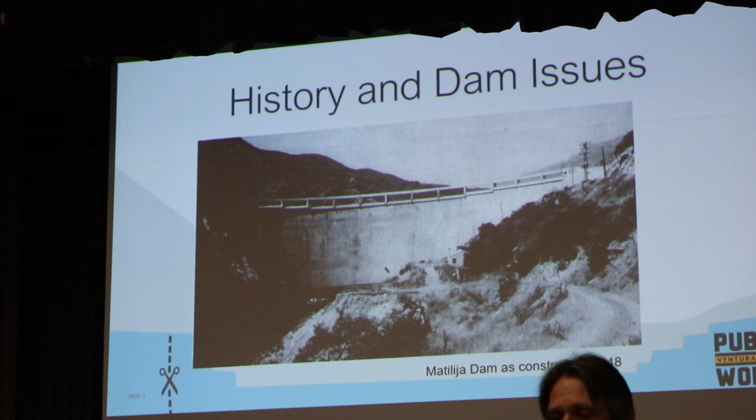Is this me or? What's that? What? Oh, no, seems like the volume's going up and down. I'm trying to keep myself.

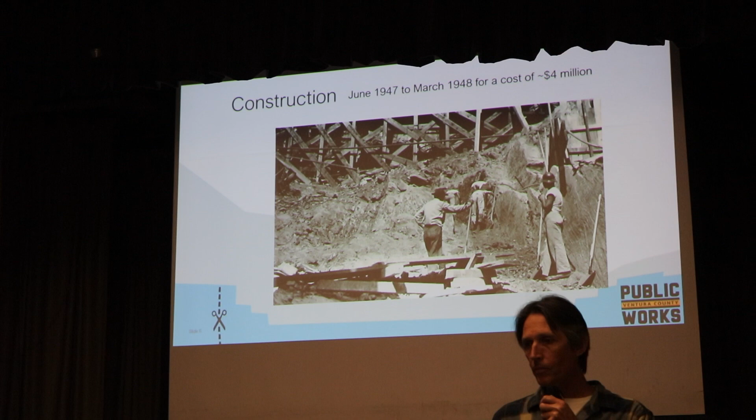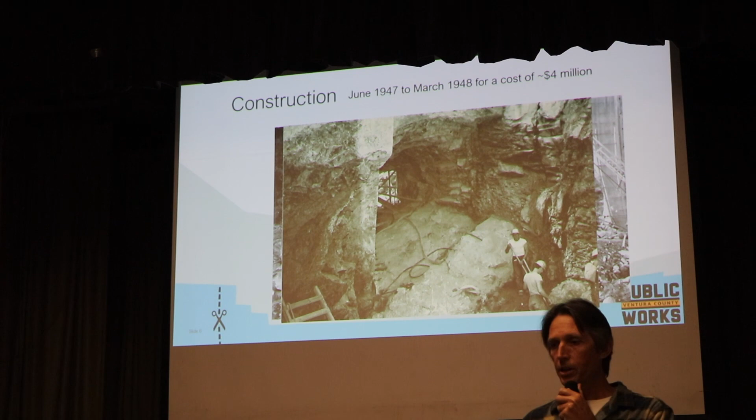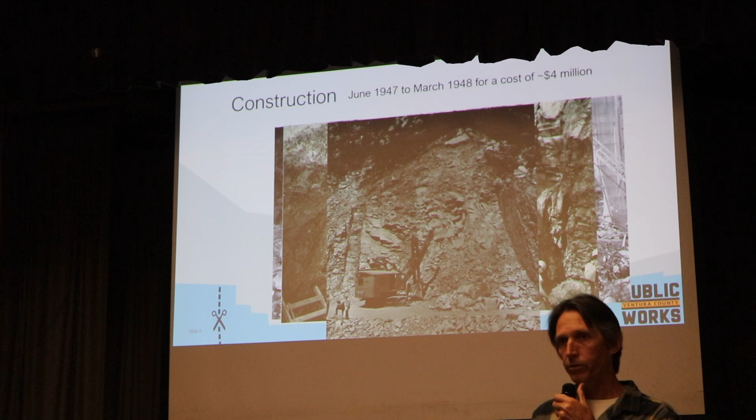So the dam was constructed starting in 1947 for a cost of around $4 million at that time. There's some really interesting photos in the Watershed Protection District's archives. And this was the first project. This was the project that actually founded the Watershed Protection District at the time. The flood control, Ventura County Flood Control District. Is there anything specific I should point out?

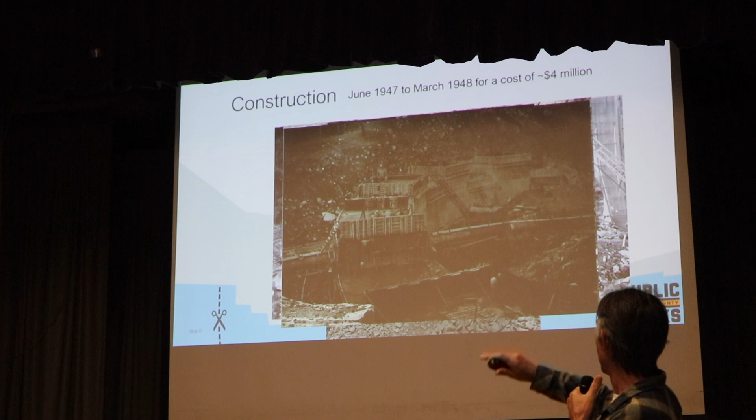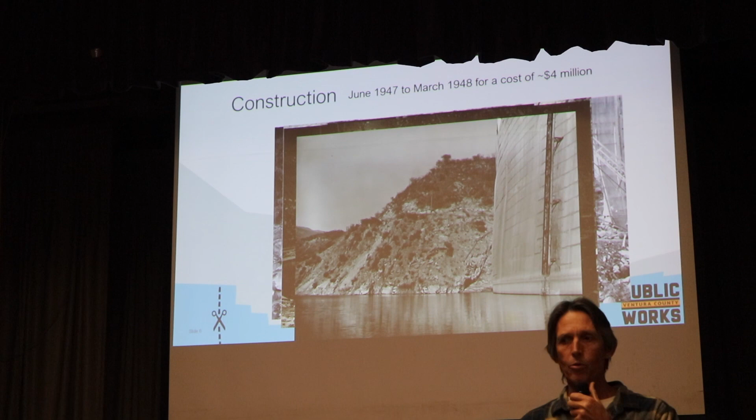You can see that the way these dams are constructed, they form it up and they pour a layer or a lift at a time, and each of those lifts I think is about 7 feet or so on Matilija Dam. Lots and lots of concrete went in. This is what it looked like when it was finally constructed and the reservoir started to fill up. I think it actually took about 4 or 5 years for the reservoir to fill. It was 1954 before it filled up.

But it was only 15 years or so before it became evident that there was a chemical reaction in the concrete. And this alkali silica reaction is actually something that was really common throughout the United States, throughout the world, and bridges failed and stuff because of this.

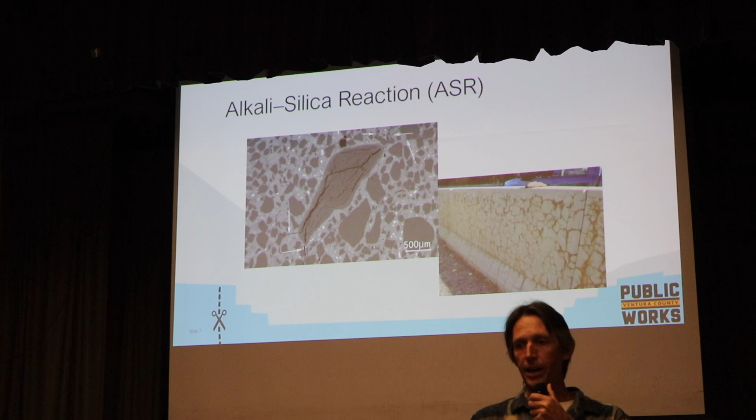The story that I heard about this is that the contractor was actually supposed to go over to the San Gabriel River to get some nice granitic neutral sediments, and instead went over here to the Santa Clara River, and our sediments here are very alkali. So that ended up creating this alkali silica reaction, which compromises the strength of the dam.

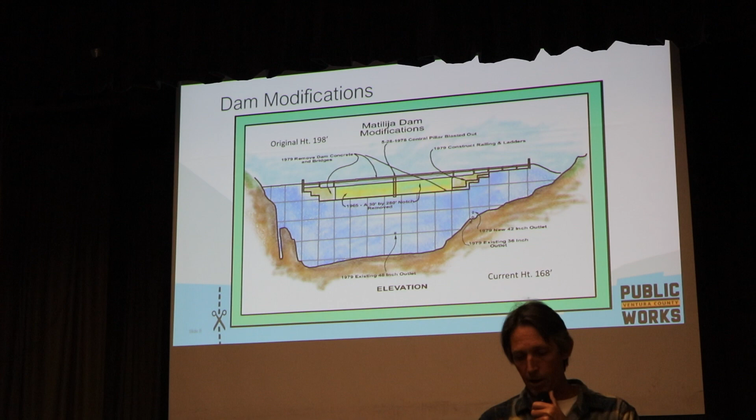So in 1965, the dam was notched down. We call that notch. It just lowered the level of the dam by about 30 feet. And you can see that middle section that's yellow there was taken out in 1965, and then in the 70s they came back and cut those stair-step things that we see on the dam today.

The original storage capacity of Matilija Reservoir was about 7,000 acre-feet, and there was a county park back there. There was boat rentals and fishing and campground and some recreation. But in comparison with Lake Casitas that was constructed about a decade later, anybody know the capacity of Lake Casitas? 254,000 acre-feet.

So you can see that Matilija was always sort of a drop in the bucket as far as water supply. But at the time, it was intended to divert water, store water that could then go through a pipeline over to the Ojai Valley and go into the Ojai Valley spreading grounds to help recharge the aquifer during the dry season.

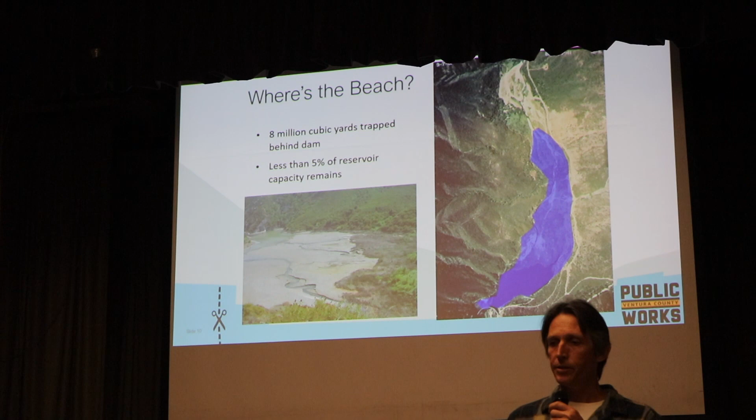Over the years after the notching and after fires and floods, the reservoir filled up with sediment. This is the fate of every dam and every reservoir on the planet. Rivers move sediment, and ultimately the reservoirs will lose their capacity and fill up with sediment.

So this is something that I've actually traveled to Japan and saw giant reservoirs there where they were actually trucking sediment out constantly 24 hours a day. And they were actually building a new island down in Yokohama Bay with all this sediment. Japanese can drive a lot of trucks around, move a lot of sediment and concrete.

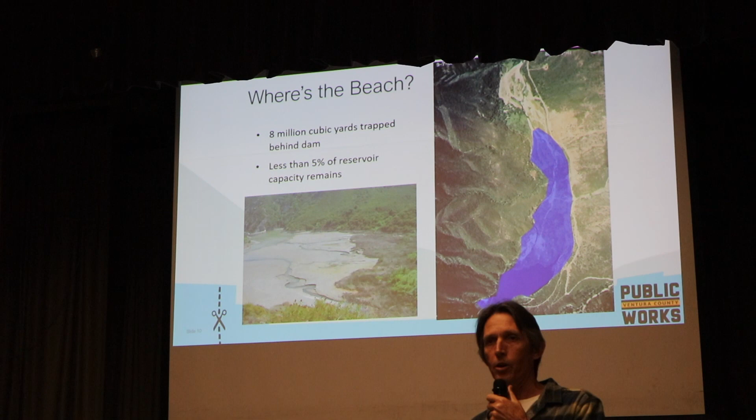But the picture on the left there, this dates all the way back to 2003, I think. It was during feasibility. And that's what the reservoir looked like when it was drained at that time. You can see how little capacity there actually is and how much sediment there is behind there.

And the reason I got involved with this was through Surfrider Foundation. The beach erosion problems at the mouth of the Ventura River led us to really start to look at what the root causes of that were. Now, construction of the bike path right on the beach was a problem. And we've solved that, or we're in the process of solving that through the Managed Shoreline Retreat project that's happening out there by the fairgrounds.

But at the end of the day, starvation of the river and starvation of sediment supplies were something that became a concern to us, and we saw an opportunity in the removal of Matilija Dam. But at the same time, there were people who had been talking about this for decades.

Many of you might be aware, this was a man named Ed Henke who had grown up in Ventura and had moved away, but he was writing. I mean, anybody who got letters from Ed Henke knows he wrote letters and wrote letters and wrote letters, and he wrote letters to the governor's office and the state congressional representatives talking about how this dam needed to be removed, because by the 70s it was already virtually obsolete in terms of water supply.

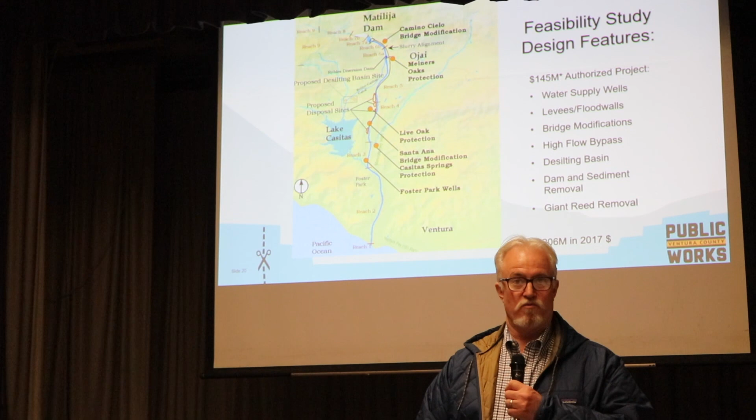And this is what the project looked like. It was a $145 million project. It was made up of many components, some of which are the same as the ones that we are moving ahead with currently. One thing to note is we did look at this $145 million, just to give you a context, in 2017 dollars, and it increased to about $206 million. So I know all of you know about inflation, the value of time. It's the same in construction and projects. The longer this project takes, the more expensive it will be.

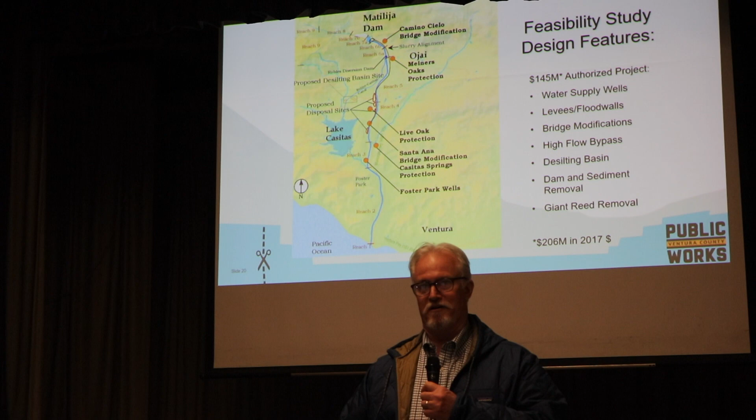So one of the components of the project, the alternative that was chosen during that incarnation of the project, was an alternative called 4B. And what that consisted of was taking all of the fine organic-laden sediment that was right upstream of the dam and putting it in a slurry pipeline and slurrying that down below the Casitas-Robles diversion. The most difficult part of this project, as anybody will tell you that's been working on it, is how to remove the dam in a way that minimizes the effect on the water supply in the Ojai Valley.

So this project looked at a number of different disposal sites, and as the Corps of Engineers moved forward with the project design, as happens in project design, the cost of this slurrying operation doubled in price. And that got everybody very concerned, both at the Corps and us as locals, of, well, how are we going to accommodate this increase in costs? So then they began to look at alternative disposal sites.

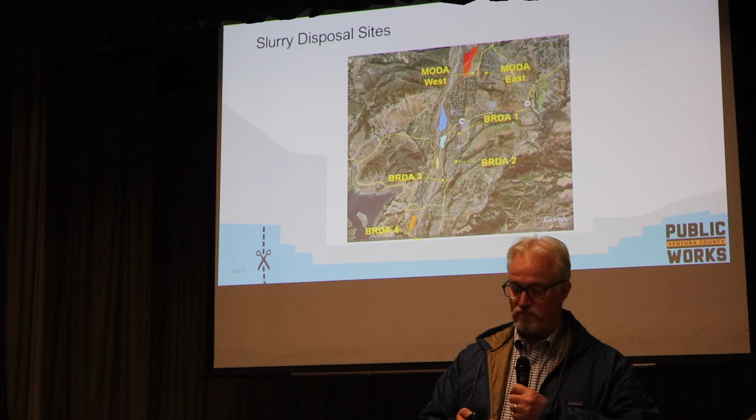And one of the ideas that came up was the idea of storing the material where it more or less exists now, within the reservoir area. That alternative was called upstream storage area, and unfortunately, in order to leave it there, because all the fines that had all the organic sediment was felt like it needed to be held there permanently, there would need to be a permanent protection of that stockpile, and that consisted of what they call soil cement, which essentially is a mixture of sand and cement to protect that.

And at that point, the stakeholders for the project had a lot of concerns, and they expressed them in a way that they really began to withdraw support for the project in moving in that direction. And so at that point, we began a process. There was a fine sediment study group formed back in 2010, and that talked about, well, what should we do? How can we move this forward? What other initial studies could we do to move the project forward?

At that point, the Corps sort of pulled back a little bit, and we haven't seen any federal appropriations since 2009. But after that fine sediment study group was formed, we formed a technical advisory committee, and that developed a scope of work that then was funded by the California Coastal Conservancy to do some additional analysis in the watershed, and that began in 2014. So I'll describe now what came out of those studies that occurred between 2014 and 2016.

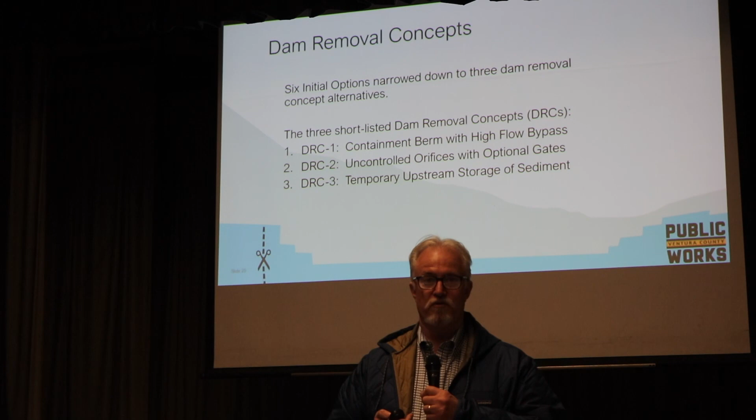There were 6 initial options looked at. Those were then narrowed down to 3, and the one that was chosen unanimously by consensus was this alternative here. And you might have heard about it. It's uncontrolled orifices with optional gates. What we would do is pre-drill 2 12-foot diameter holes into the dam. We would leave the upstream-most few feet of the dam in place, so there's not a hole all the way to the upstream end of the dam.

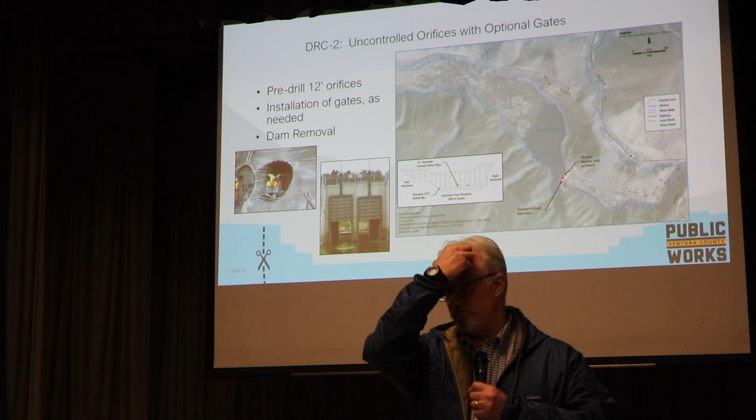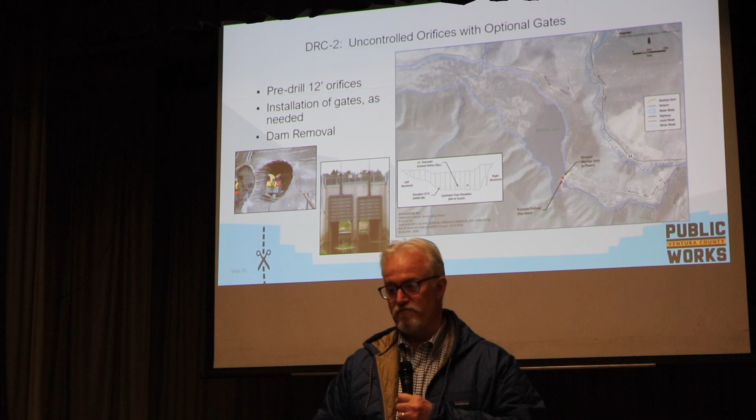And then we would wait. We wait for an event that would be able to flush the fine sediment out to the ocean. So the sediment that's just upstream of the dam, that fine sediment, is probably a couple million cubic yards of fine sediment that has a mixture of silts and clays and some organic material. That's the material that we have to get past Robles. And so we did quite a bit of analysis of this alternative. We had a consultant take a look at what the impacts of the alternative would be.

Here's a project here, the Condit Dam removal. It was removed in a very similar manner, where all the fines were flushed through the dam. And so one of the things about this concept is that projects like the Condit Dam in 2011 weren't known back in 2004. So some proof of concept projects occurred in the intervening years that we didn't have the benefit of knowing about.

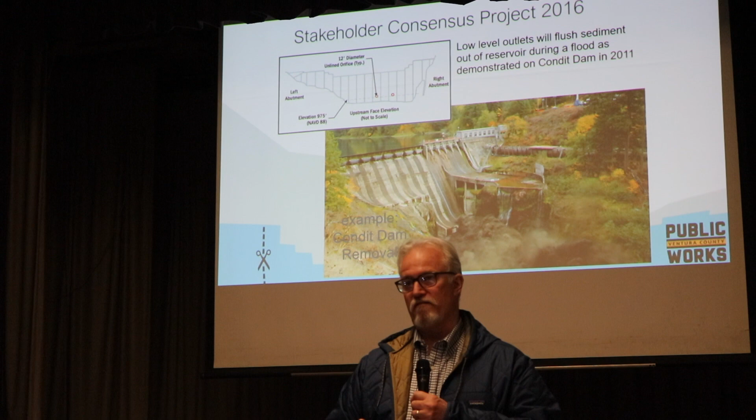So the process of that erosion of the fine sediment would look something like this. The low point, or the thalweg of the river behind the dam, we believe is still there. And as that fine sediment begins to flush through, we believe that it will find that original low point in the river. And over a few days to a few weeks, we essentially would get all the way back down to the original bed elevation.

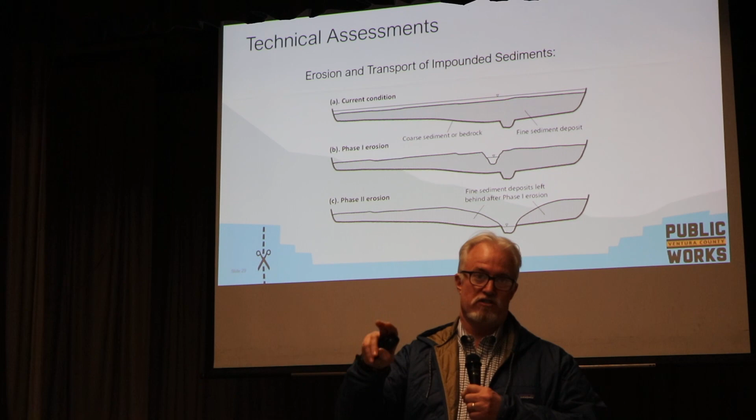Now, some of the sediment that's behind the dam now would stay there. Right now it's super saturated. It's sitting in water like a bathtub. But when the orifices are opened and the sediment flushes through, all that sediment that doesn't get flushed out will begin to drain and will then be restored with native vegetation.

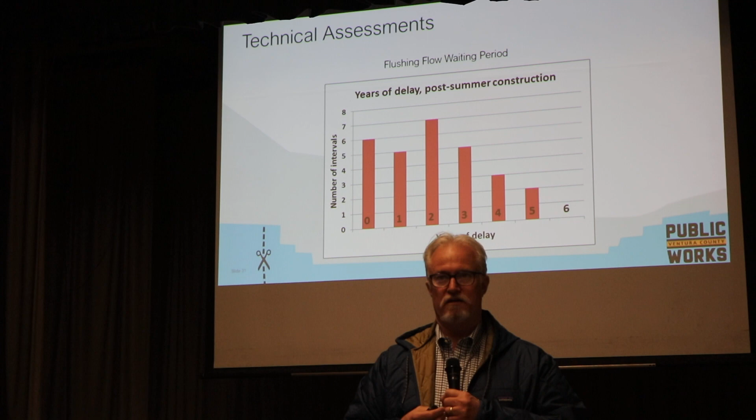Now, what we need to wait for is a good storm to flush that fine sediment. And our consultants, Stillwater Sciences and AECOM, have determined that it's about what we call a 1,700 cubic feet per second average daily flow event. If you know the definition of cubic foot per second, a cubic foot is like a basketball. So if you threw a basketball past you in a second, that would be 1 cubic foot per second. Well, we're looking at 1,700 cubic feet per second averaged over the whole day.

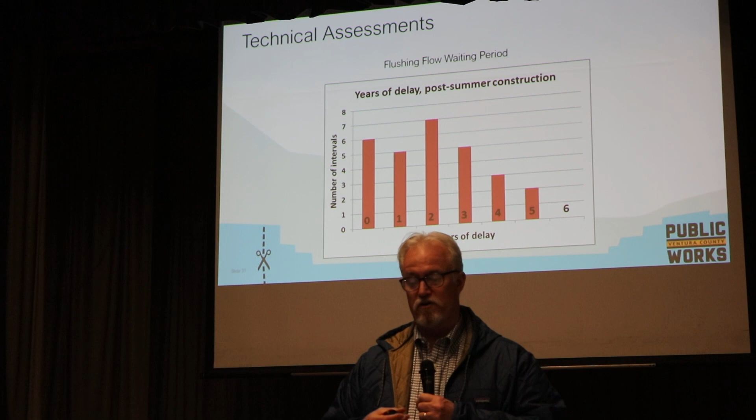So it would be an event that would last the whole day, and it would have a peak of probably around 3,000 to 3,500 CFS. And those events don't come every year. So on average, they come about every 3 to 4 years, but it's not precise. In some years, we can have that event come in subsequent years, and in some cases, every 2 years, every 3 years, every 4 years. It's even taken as long as 6 years between those events.

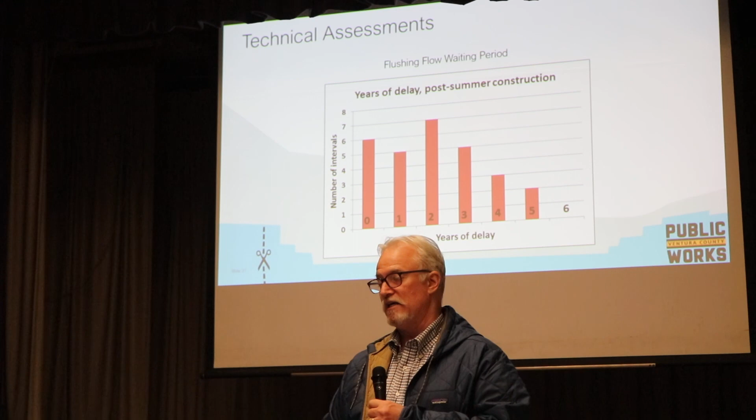So it would be a medium-sized event, not a large event like the 1969 event. But it would be after we're ready to remove the dam, and we cut out those two orifices. It could take a few years of waiting for that storm to flush that fine sediment.

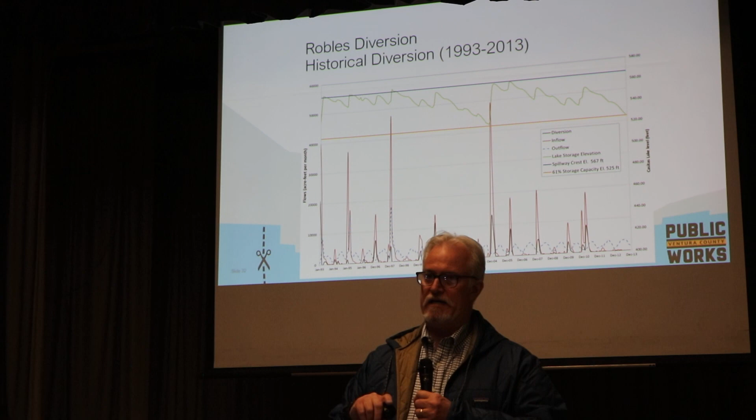So one of the things that our consultant looked at was the impact to the Robles diversion, because what they determined was that we would miss one storm event. Casitas would not be able to divert during one storm event. And Casitas gets about 30% of their water from the Robles diversion. About 70% of the water comes from either the watershed that drains to it, Santa Ana and Coyote watersheds drain directly into Casitas, or the water that falls directly on the lake. But that 30% is very critical.

And one of the analyses that we showed is without Robles and the current customer base that Casitas has, that lake would go dry. So Robles is an important element of Casitas' portfolio. So what we found out was that that one storm would lose about 4 to 6% of the reservoir capacity diversion. So that 4 to 6% would be carried through until the reservoir filled back up again, and then that impact would be gone completely. So what was determined was that it's likely that we would have to go through a series of wet years in order to fill that reservoir back up again.

And as all of you know that live in the valley, Casitas is low; it nearly spilled in 2005, but it's been coming down ever since then, and that's because we've been in a fairly dry period since 2005. There's no doubt in my mind that when we go back into a wet period again, that reservoir will fill back up, but we need that to happen. So in the case of this project, that 4 to 6% of the reservoir capacity would be lost until we went into a wet period again.

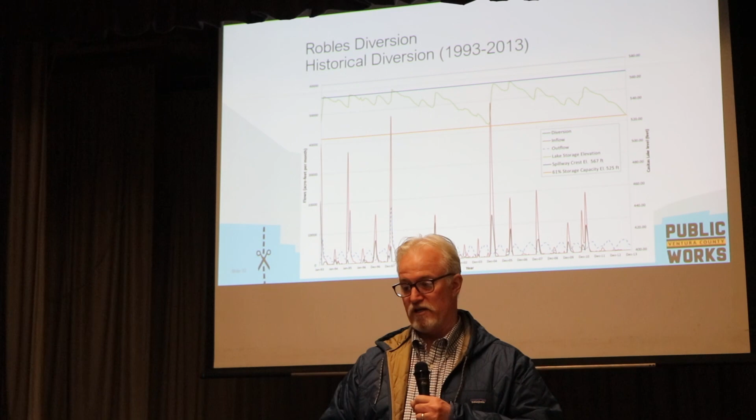So because of that, we did do some studies on the water supply mitigations, and what that means is what could we do to mitigate that impact to the water supply. And so we looked at 23 different options, and they consisted of diversion replacement supplies, reuse and conservation, and then treatment alternatives. So we've looked at all those issues. We're just getting ready now to begin to do more work in this regard, which we'll talk about later in the project meeting.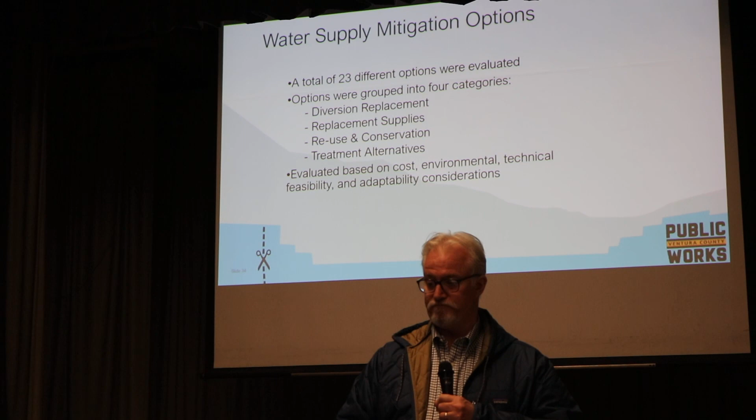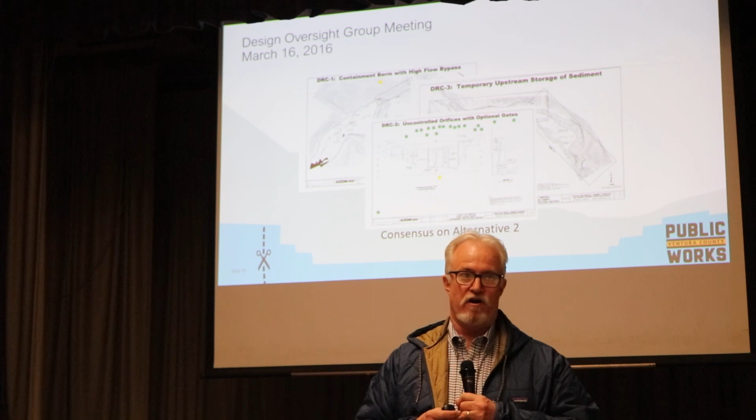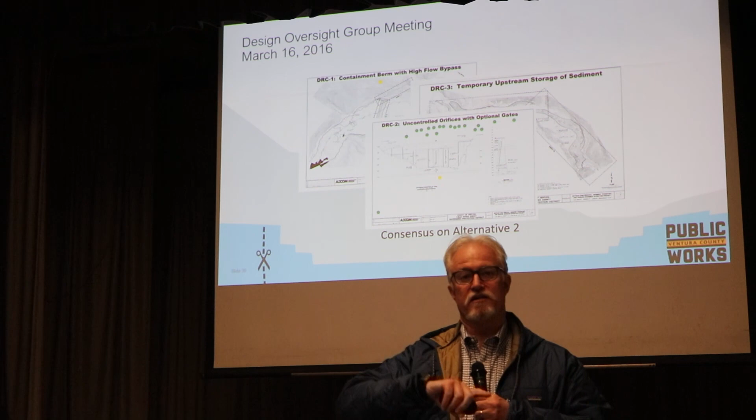So after all this work was done, in March of 2016, we met with the project stakeholders, a group that we used to call the Design Oversight Group, and we presented all three of these alternatives. What we presented was that one of the alternatives, which I didn't describe, was much closer to the Corps of Engineers alternative and might have an easier time getting approved by the Corps. The alternative that they ultimately did choose, which I described, is not like the Corps' alternative, and we would have had to basically go back to the beginning of the project with the Corps if that alternative were chosen. That's the alternative that was chosen, and there was a lot of discussion about if we pick the right alternative, we'll be able to find funding.

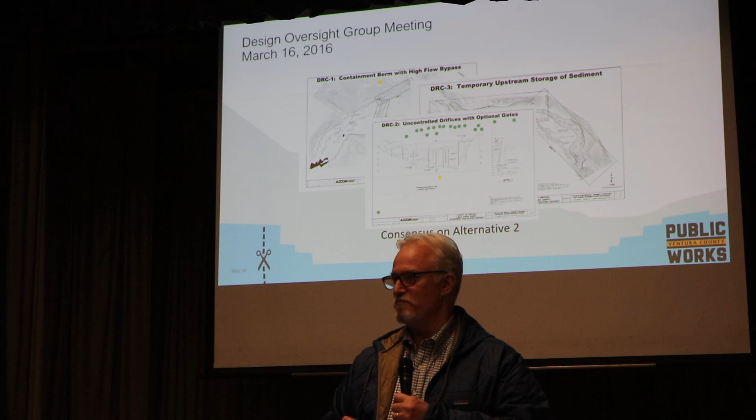Of course, representing the owner of the dam, the Watershed Protection District, the questions that came to mind were, how? How are we going to be able to come up with the money to remove the dam? So during that meeting, we essentially created a funding committee, and Hans Cole was gracious enough to accept the job of facilitating that group, and has done a great job since he's been involved. And our mission was basically to develop a funding plan, obtain grant funding, and guide the project team along the line. There's been a lot of great work in that regard. I won't belabor that now because there's more meeting to go. But out of that funding committee in 2016 is kind of how we've gotten to where we are now.